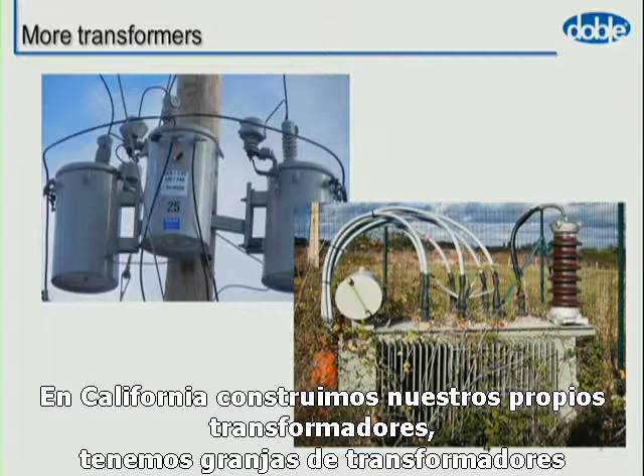Inside, they're complicated. You can just see outside all around the place pictures of transformers. They are complicated devices, and they will fail relatively easily if you know what to do.

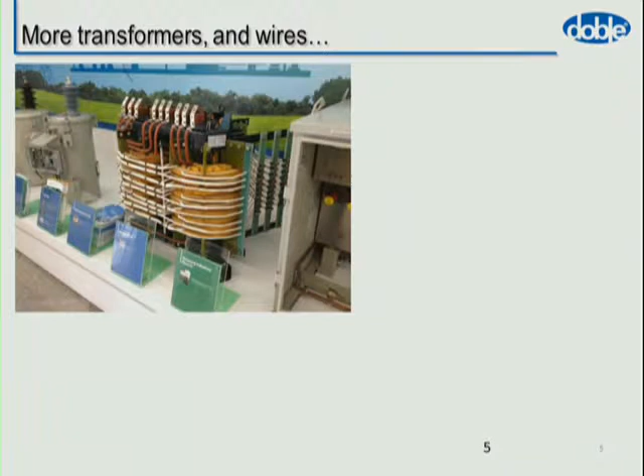In California recently, a year ago now, there were a bunch of transformers taken out of service by some snipers, terrorists. That one is still being investigated. We've seen pipe bombs on substations. These are external causes of transformer issues.

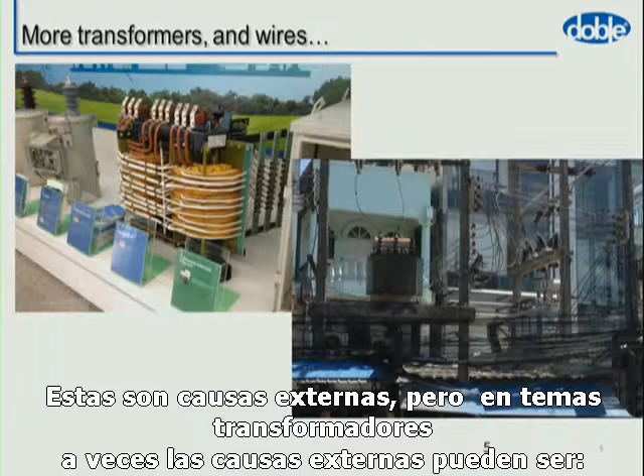Sometimes those external causes can be how you put the transformer together. So this is a transformer, very small, it's pole mounted, it's got its own little set of bushings. There's a transformer on the right, it's got its own little conservator.

Problem is, it doesn't matter how clever you make the transformer, if you then encase it in an operational network where you've got no idea what's happening to it or when, or who attached wires to it, you're going to have a problem making sense of the data. But ultimately, a transformer is relatively simple.

ISO 55000 is an international standards organization standard for asset management, published in January of 2014, this year. It was based on the previous standard, PAS 55. This standard tells you what an asset is: anything that can bring value to your organization. It's up to you to decide what value that is. And asset management is just a coordinated activity of bringing that value out.

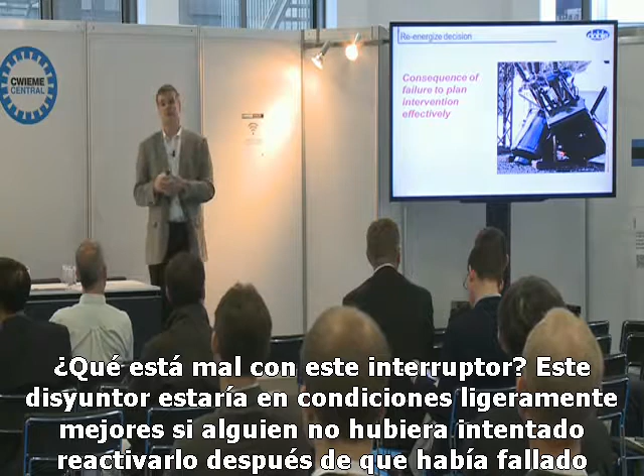What's wrong with this circuit breaker? This circuit breaker would have been in slightly better condition if someone hadn't tried to re-energize it after it had failed. This may seem like a ridiculously small thing.

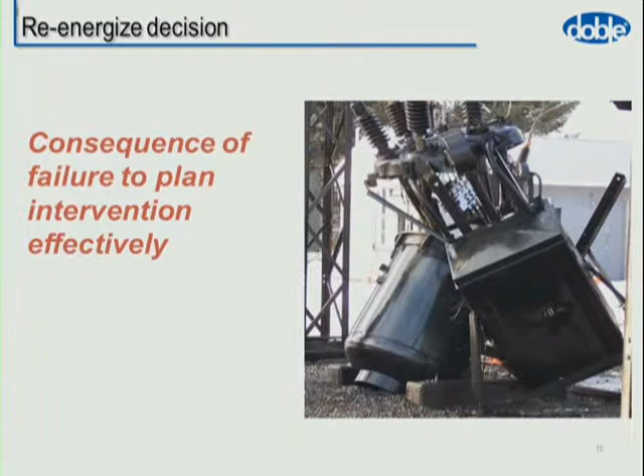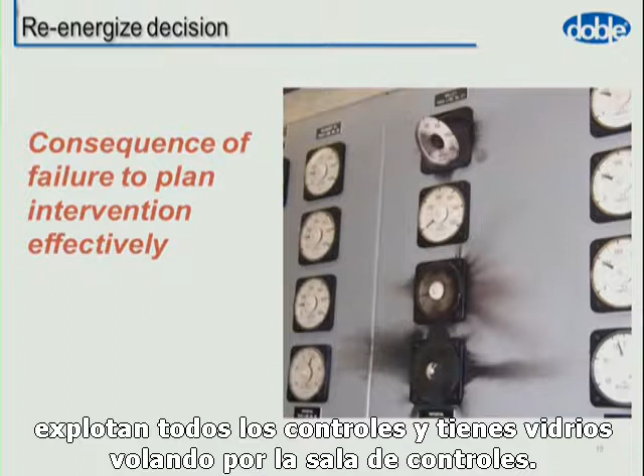There's a control room, they're looking to see if they can re-energize a breaker. They're told it's okay, R210 can go back in, they switch it in. The wrong people have been looking at this. That put 11 kV back on the control wires, sent the energy back into the control room, burst all of the controls, and you've got flying glass across the control room.

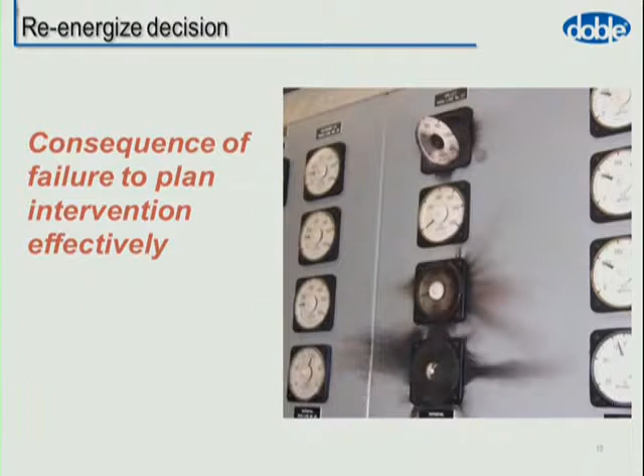Unexpected consequence of a failure. You have to think in terms of what might happen and will result. An intelligent approach will make sure that you don't put that back in service unless you've actually done a proper visual. You need trained people.

And if there's one thing that comes out of this talk, it's knowledge. Someone somewhere has to know what they're doing. Someone has to know what's going on.

Excuse me, sir, could you click on the Life of a Transformer seminar for me?

This is some slides. Each year Doble runs a Life of a Transformer seminar, and we run this as a course. It's 5 days. This particular one is a number of years old.

I've taken a couple of slides from an old buddy of mine, Jin Sim, who runs a thing on how you make a transformer. The point about this is that you're winding coils. I would imagine at a coil winding and industry expo that a lot of people know about this - quite often people don't. And the important thing about coil winding is that you're still using the same techniques, and we're still applying those same techniques from a long time ago.

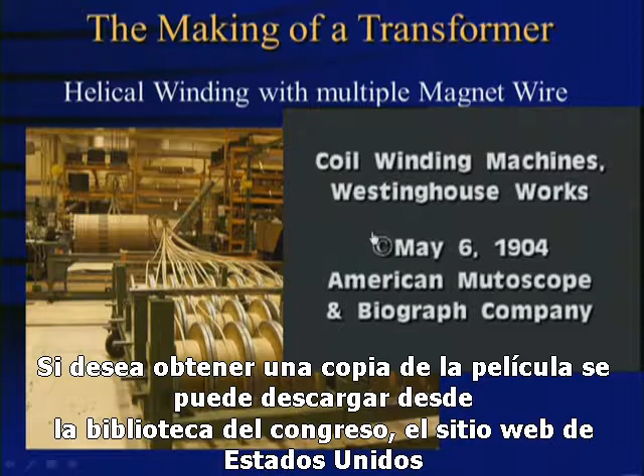Could you click on the video? So this is a movie from Westinghouse. This is 110 years ago. If you want to get a copy of the movie, you can download it from the Library of Congress, which is a United States website.

On the left, you have drums of wire being wrapped into transformer winding. On the right, you have the same approach, big coils of wire. It hasn't really changed that much. The basics of a transformer are the same as Faraday would have recognized 160, 70 years ago - copper, paper, oil, steel.

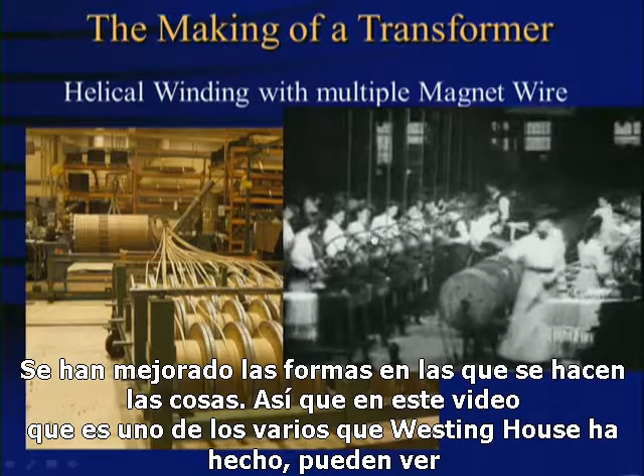We have improvements in the way things are done. So in this video, it's one of several from the Westinghouse works. You can see one, it's all the women who do the work. And two, we have asset managers - they're the ones who wander around looking to make sure everything is done correctly by the women who are actually doing the work. Okay, that's enough of that one, thank you.

So if you just escape out of that.

The life expectancy of a power transformer, IEEE - IEEE will give you that at full load, a standard transformer should last 180,000 hours, 20.55 years.

Peter, could I get... Sorry, it rains, so all of my moisture is external at the moment. I'll just take.

This is an interesting slide. As one, most transformers are not loaded to 100% of the time. And two, we're based on a hotspot calculation, and the hotspot you don't measure 100% correctly, you measure with an estimation. So most of our calculations about the actual aging of a transformer are an estimate. We don't know the true hotspot, we don't know exactly how precise that value is, and we don't know how long it's been at that temperature.

But if we have an estimate, we can then say what the degree of polymerization should be at the end of life and how long our transformer's got left to live.

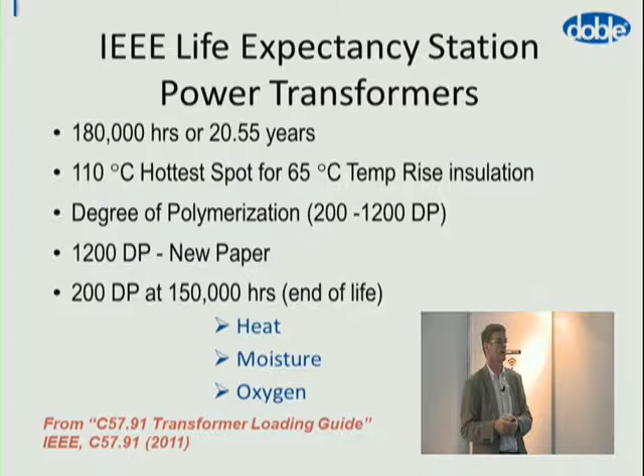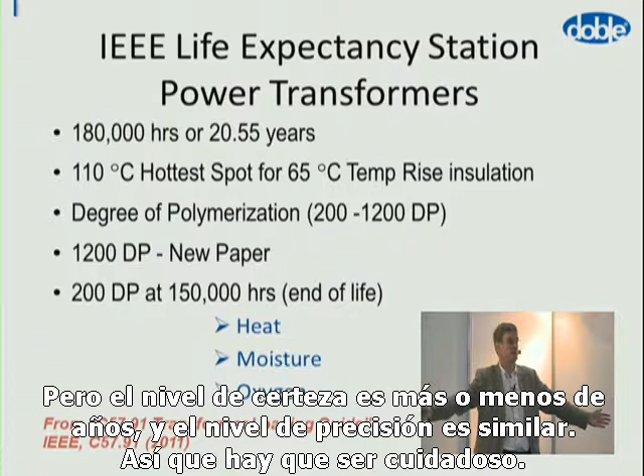People talk about 180,000 hours of life, and you can work out how many years, months, days your transformer's got left. The interesting thing is people will give those numbers in terms of 3 years, 6 months, 4 weeks, 2 days, 7 hours, 5 minutes, and 28 seconds. But the degree of accuracy is plus or minus years, and the degree of precision is similar. So you have to be careful.

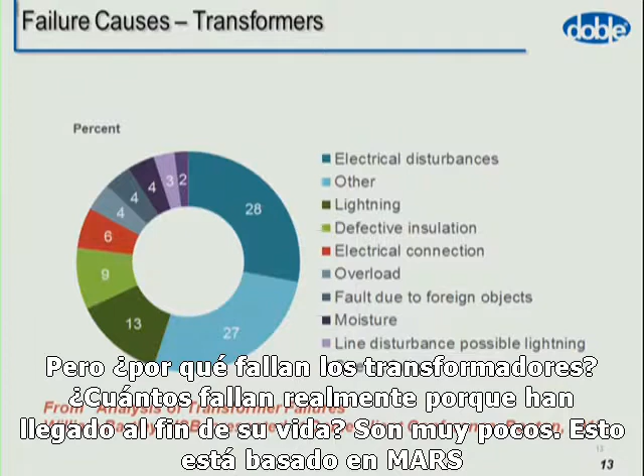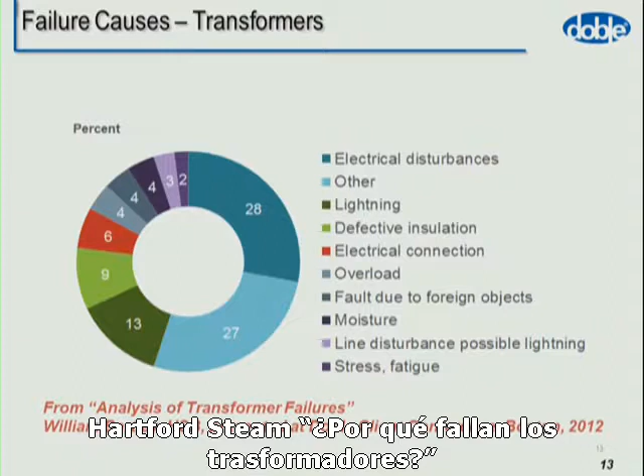But why do transformers fail? How many actually fail because they've just reached end of life? It's very few. This is based on a different company, Hartford Steam Boiler. A gentleman called Bill Bartley presented papers when he was working for Hartford Steam. Why did transformers fail according to the information his clients gave him?

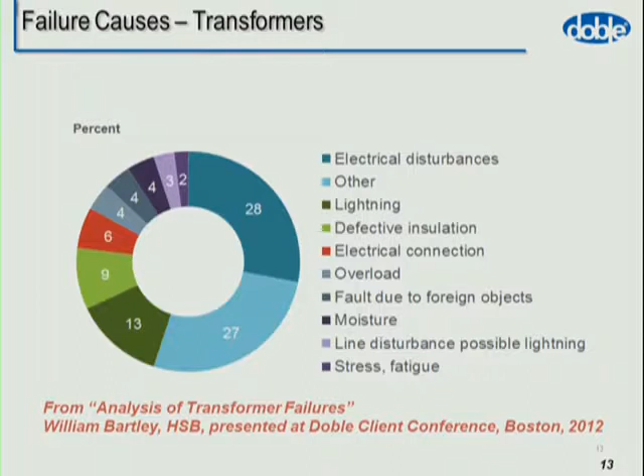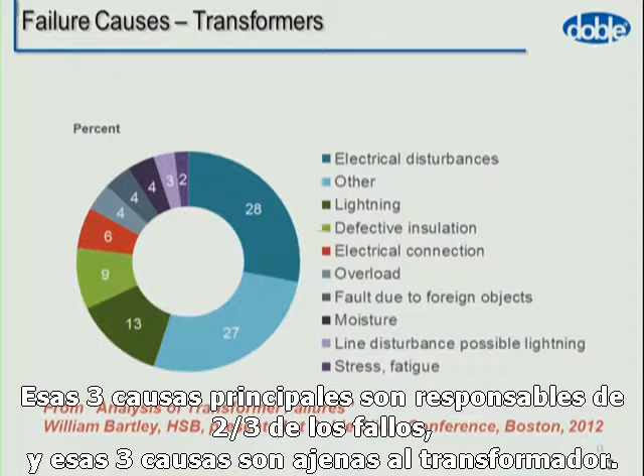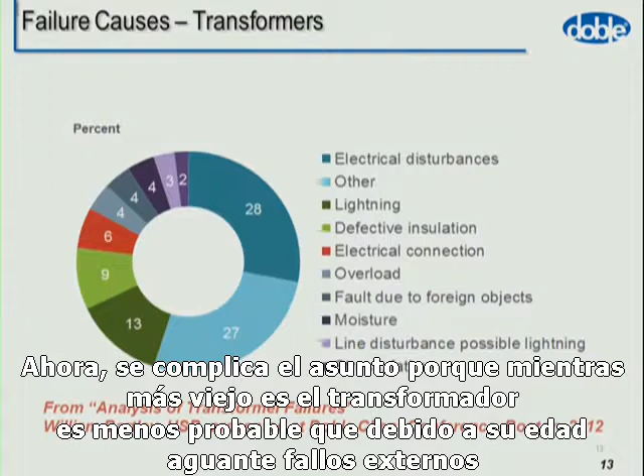Important thing, look at the top 3 causes: electrical disturbances outside of the transformer, other causes outside the transformer, and lightning. Those 3 main causes account for 2/3 of failures, and they are all external to the transformer. Now it does get complicated because the older a transformer is, the less likely it is, because of aging, to withstand an external fault. But 2/3 of the problems are externally caused.

Vandalism, lightning, other sources—our intelligent condition monitoring is not necessarily going to address those causes. So if you have a transformer, think in terms of how we're going to look at all the different sources. If, however, you look at those failures, remember they're based on what people say. These are insurance claims, which are supposed to be exact truth. They aren't always exact truth.

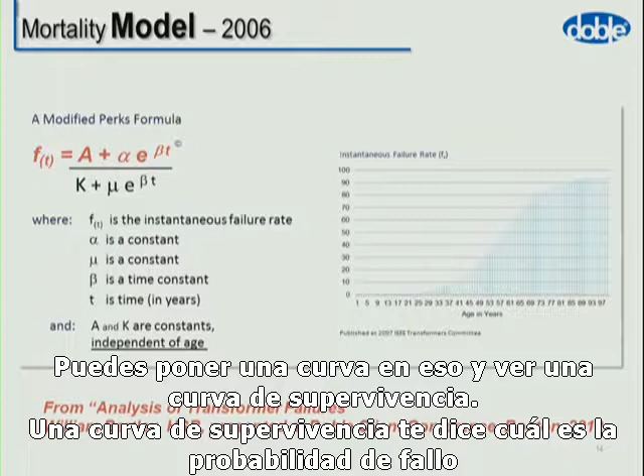You can put a curve on that, and you'll see this as a survivor curve. A survivor curve tells you what the likelihood of failure is and how many of the population should have failed by a certain age. Bill Bartley and his colleagues put together a formula. Your challenge in conversation today is to use the phrase 'modified Perks formula,' which is what this is—I never knew there was a Perks formula. What you often see with this type of chart is a nice increasing failure rate curve. Unfortunately, real life isn't necessarily like that.

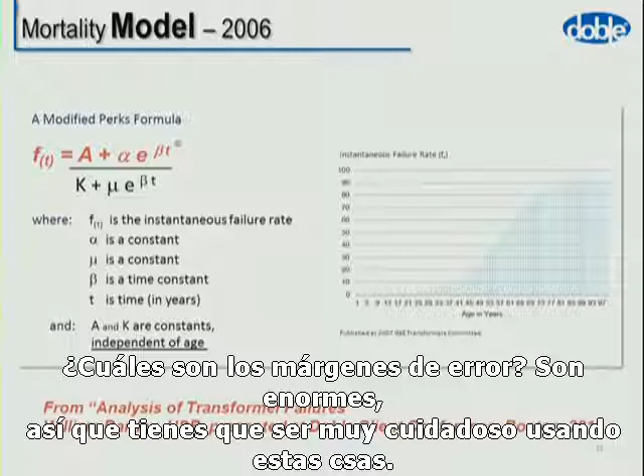Two things: what are the accuracy and precision? What are the error bars on those measurements? They're huge. So we have to be very careful about using these things. But it does say, based on his information, that about half your transformers should have failed by the time they're 40 years old. In my experience with Doble, having looked at thousands of failures around the world, that's not the case.

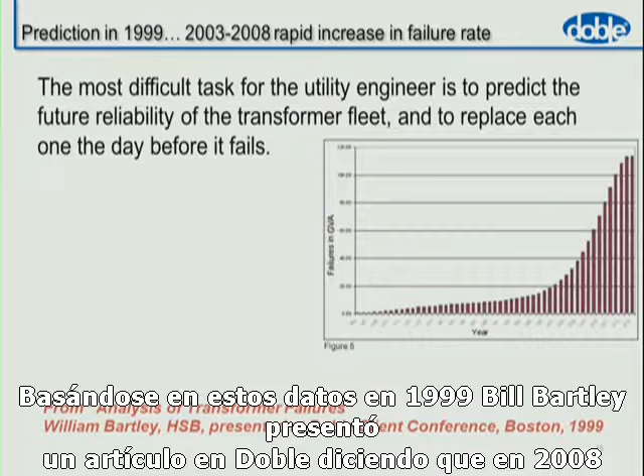On the basis of his results in 1999, Bill Bartley presented a paper at Doble saying that in 2008 there would be a huge rise in failures and the world would not be able to build enough power transformers. So we went to see him in 2011 and said, you need to rewrite the paper because it didn't happen. So he rewrote the paper.

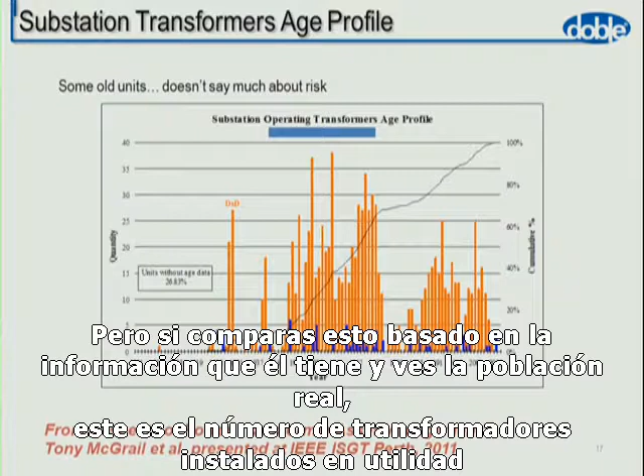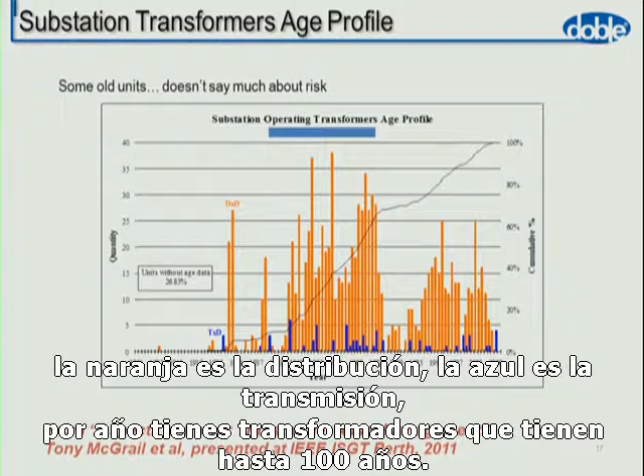12 years on, he's moved the date back 12 years, now predicting in 2020 there will be a huge rise in failure rates and we won't be able to cope. But if you compare this to an actual population—this is the number of transformers installed at a utility, the orange being distribution, the blue being transmission by year—you have transformers going back over 100 years: one from 1907, others from 1920, 1928.

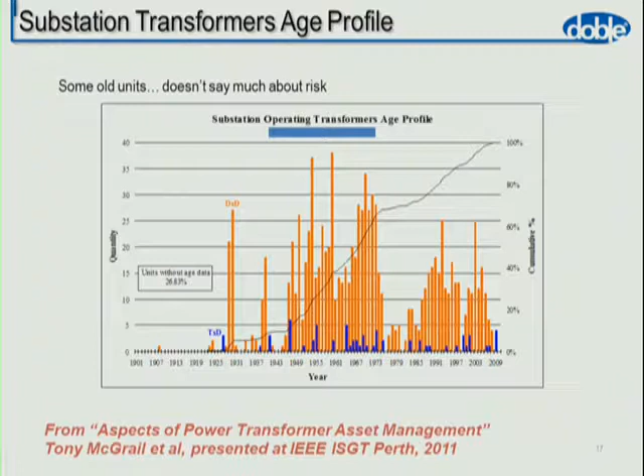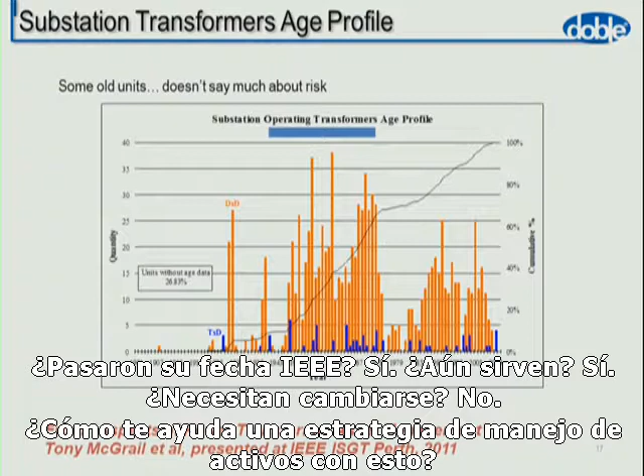They're big transformers and they work fine. Have they gone past their IEEE sell-by date? Yes. Do they still work? Yes. Do they need replacing? No. I was the asset manager who helped put the strategy together to deal with these. You don't need to replace these because they're old, and you don't need to replace them because they've seen a lot of life—they were built to withstand it.

So a lot of these transformers from the old times will still be there in 100 years' time, unless you have those 2/3 of external causes—lightning, vandalism, system faults. But even then, they're built big. So what we found was that the probability of failure during the first 70 years starts high and fades away. It's the start of a bathtub curve, and likely by the time you get to the bottom of that curve, random failures will just take over and you won't see the far end.

But we're seeing 60, 70, 80-year-old transformers, and the failure rate for that population is not increasing. Is it worth putting monitoring on those transformers? Probably not. How much do you need to know about a transformer that has sat there for 80 years doing its job? How much more can you learn about that transformer? Probably very little.

But the interesting thing is, as Marsh, as HSB, as Aegis, other insurance companies will tell you, the transformer is a very small part of the insurance loss. It's the business interruption. So we're interested in transformers and their failure because it may take out the generator station, may take out a chemical plant. It's that dollar consequence which is huge.

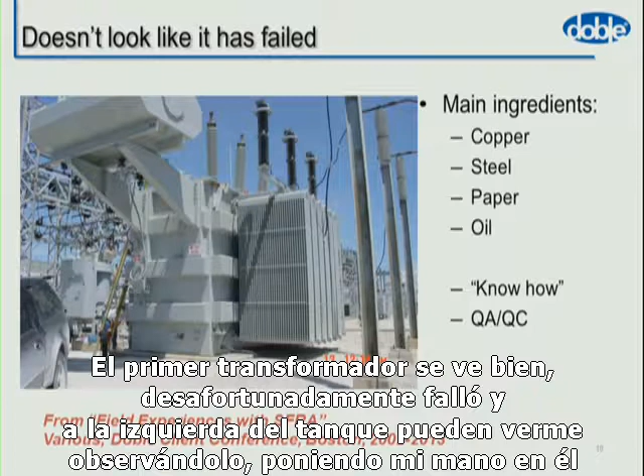So that transformer looks okay. Unfortunately, it's failed. I'm just on the left-hand side of the tank. You can see me looking at it, putting my hand on the tank and saying, do you feel okay? Because it's very difficult to tell. You take the windings out from the transformer, very complicated device. That's a failed transformer. That one was repaired, put back in the tank, put back in service.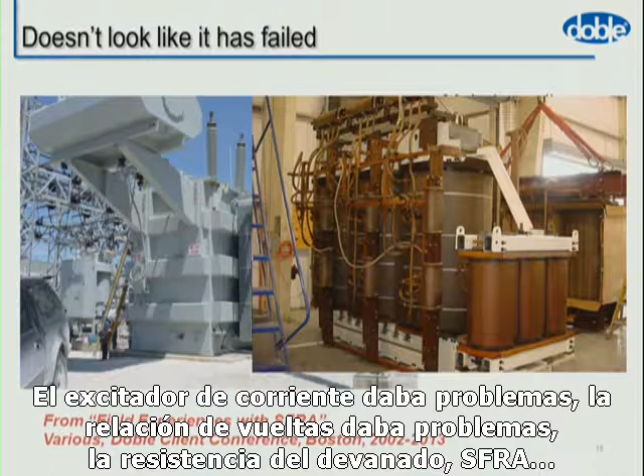That was actually identified using about 3 or 4 different techniques. The exciting currents gave a problem, turns ratio gave a problem, winding resistance, SFRA, a whole bunch of different things gave a problem. And you have to put all that information together to try and identify the cause, to see if it's worth taking to the factory to take it out and fix it, because it all costs money.

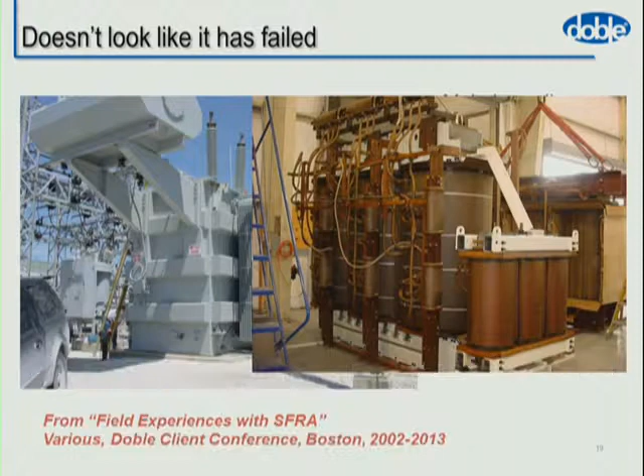This transformer hasn't failed. It's the same transformer. It still has not failed. It was pushed. It didn't fail. Something else damaged it. So you have to be very careful about failure statistics.

And now the consequence is going to be, is there any oil from the transformer in the river? That's going to be a cleanup cost, which the company is liable for. And in the UK, in Europe, they're not the transportation company - the owners of the transformer are liable.

Standard transformer fire. If you do things right on a substation, you can build cable trays between transformers to allow all the cables to be connected. You often find snakes and small animals.

In this case, one transformer failed. It's the one on the left. And it failed because a snake crawled up the bushing, caused a flashover, bushing failed, transformer followed. Oil from that failure went into the cable tray, moved along to the next transformer, took that transformer out. One snake took out 4 transformers. It's in Arizona.

How much condition monitoring do people sell for snakes? Do you have a snake monitor?

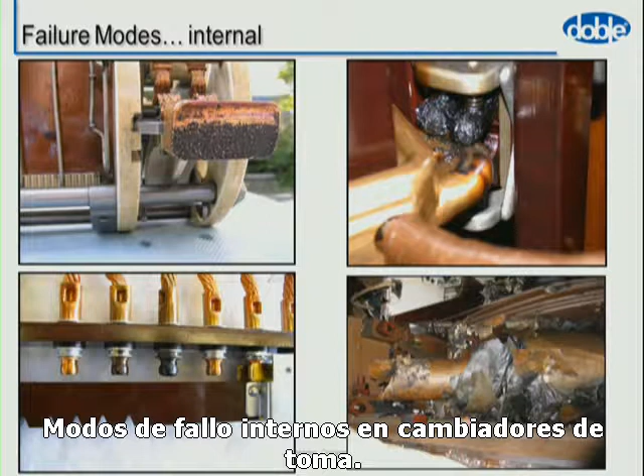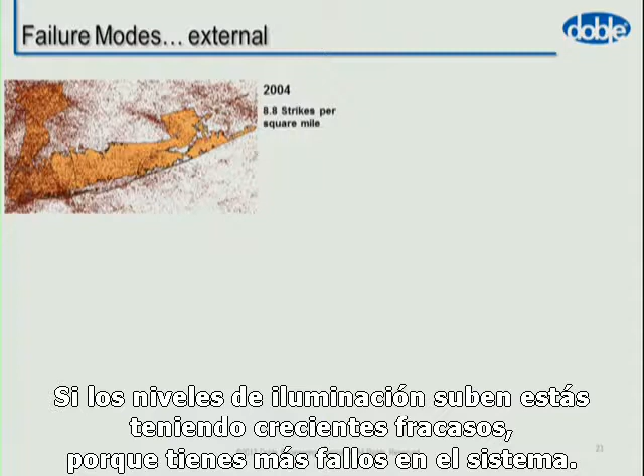Internal failure modes, coking on tap changers, overheating of windings at particular design spots. Lightning - if the lightning levels go up, you will have an increase in failures because you have more faults on the system.

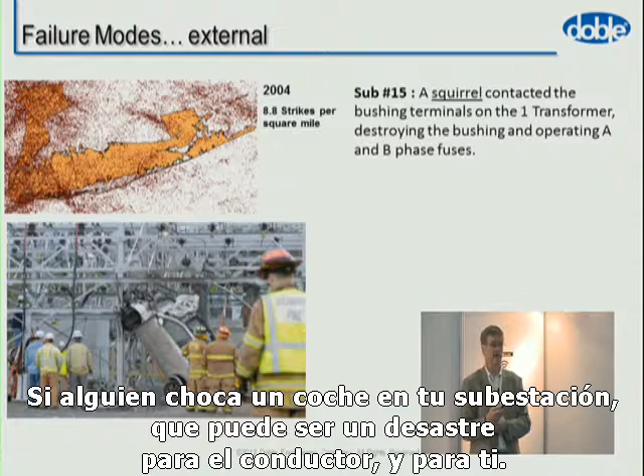If you have animals contacting - snakes, squirrels, birds - they too will cause problems. Someone drives a car into your substation, that can be a disaster for the driver, but also for yourself. And then you have lightning. I think that's staged, it's a Hollywood movie, but it gives you the idea.

If you look on YouTube, there are pictures that people have taken while driving along, and they happen to see lightning hit a pole-top transformer. Those are available for download, quite spectacular.

What monitoring do we do for lightning? We can pick that up. But the question is, where's the intelligence? If I'm going to have a smart grid, I want to put that intelligence so my transformer is protected and the business it serves is protected.

So part of the intelligence is, do you justify a decision? So in this case, I'm making a decision. On the left side, I have a transformer, it's been damaged. Do I replace it or do I fix it?

Simple decision. In this case, it's false that you should replace it, and it's true that you should refurbish it or fix it. The nice thing about this approach, it's a decision tree, is that you can put prices, you can put dollars against the different outcomes, and you can put probabilities. So we've identified that the chance of a new one failing is 1% at $1 million, and the chance of a refurbished unit failing is 5%.

You can then work out the expected monetary value of your decision, and you should refurbish. People like spreadsheets, and this is just spreadsheets. You can take the level of analysis one stage further, and you can do this in real time, continuously, looking at all of the available data.

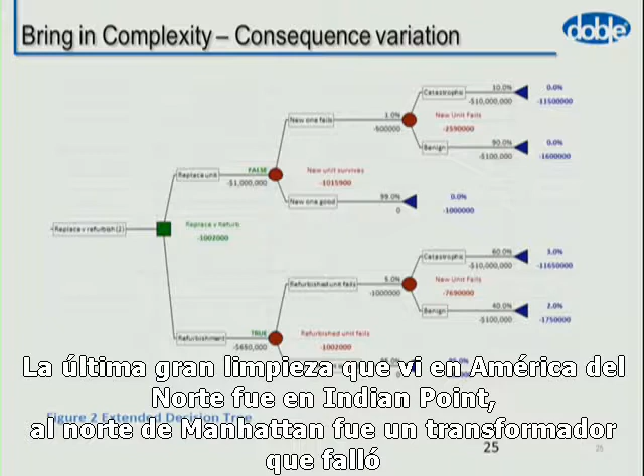What happens if we add in that the failure may be catastrophic, and now we don't just have the cost of a new transformer, we have the cost of the cleanup, and the cleanup could be $10 million. The last large cleanup I came across in North America was at Indian Point, just north of Manhattan. That was a transformer that failed. It was a $20 million US cleanup cost, PCBs in the Hudson River.

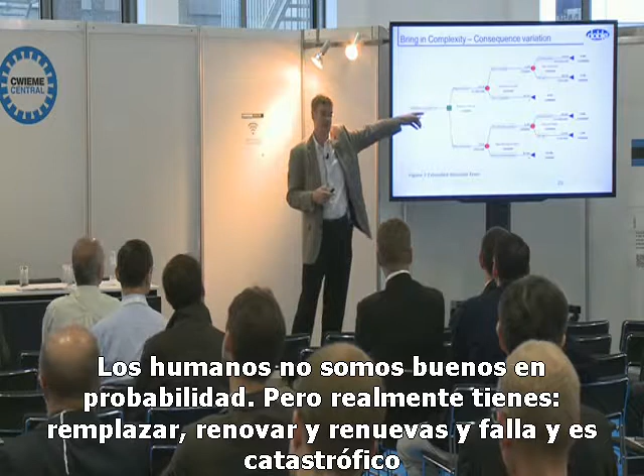There's a huge possible cost implication, but only a small chance it fails, so we've got to do contingent probabilities. Humans are not very good at probabilities at all. But really you've got replace or refurbish. If you refurbish and it fails and it's catastrophic, that's probability of A given B. What is the cost? But it's still true you should refurbish.

As part of an asset management system, ISO 55000, this is the start of a decision to replace or refurbish. If you want to make an intelligent decision, you need intelligent data, and tools which justify the decision, so someone can come along and audit it.

So a little bit on condition monitoring. Three C's: control, context, conclusion. You have to control the measurement. That doesn't mean we over-control - there's no point making a temperature measurement to 4 decimal places on a power transformer. We don't need the ambient temperature to 2 decimal places. It's not useful. Understand the context of the measurement.

If you're making a measurement, you have to know - did the transformer trip out? Did I take it out for maintenance? Have I used this with lots of through faults? What's the context of the decision? And when you make a decision, it has to be a conclusion which is actionable. People don't understand that you can either do nothing by default, which is ignoring it, or you can decide - do nothing by design. You have to have an actionable conclusion, an intervention.

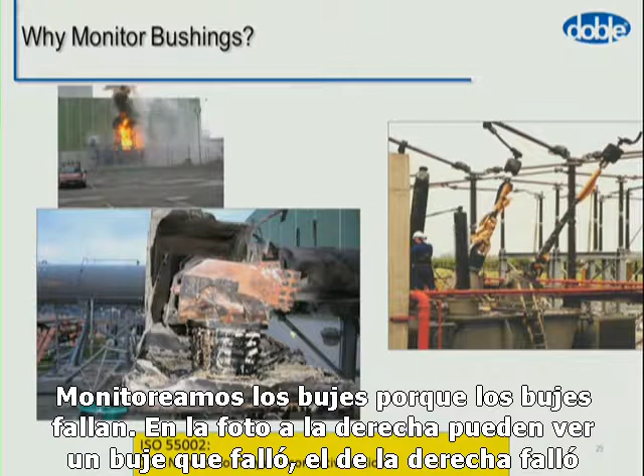Let me give some examples. There's a paper from guys in Australia at the 80th conference we had in 2013, looking at bushings. Why monitor bushings? Monitor bushings because they fail. In the picture on the right, you can see the bushing on the right failed. The bushing in the middle, which has been taken apart, did not fail - it was killed by something else, which is the bushing next to it failing, and the explosion which took it out destroyed the center phase.

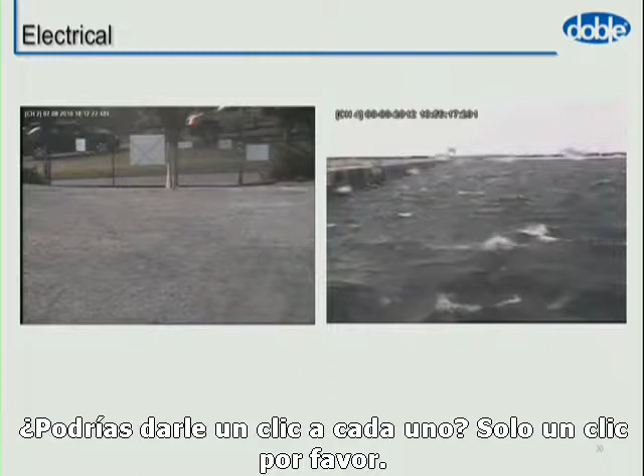So the video on the left is very, very quick when it happens - that's a bushing failure. How much monitoring would you need on this substation on the left to be able to detect a bushing fail? You could sit there for 50 years seeing nothing. There has to be a cost benefit to justify that failure being identified.

On the right, you've got a bushing at an oil circuit breaker. Again, you could sit there with a lot of monitoring for a lot of time, but when that bushing fails and takes a circuit breaker out, there is a big consequence. The main cost of this could be purely reputational and stock price. But there's a lot of interest in these things. How would condition monitoring help with those things?

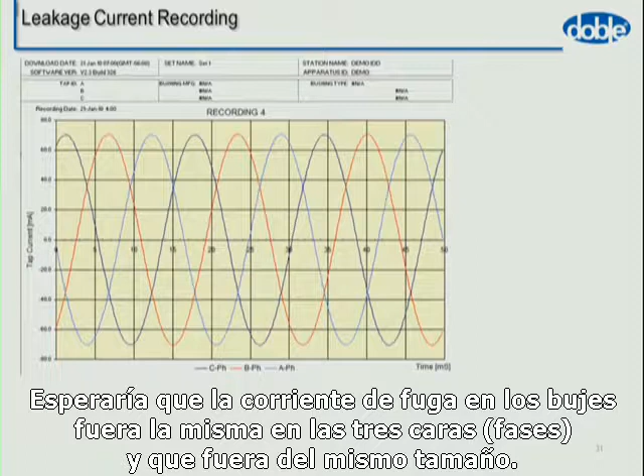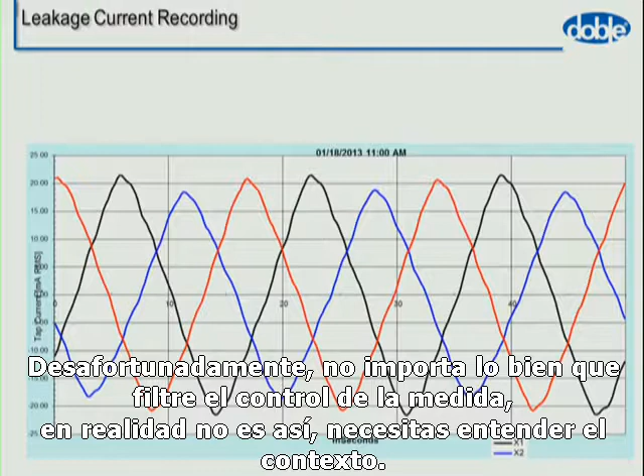You can measure the leakage current through the bushings - it's relatively easy to do. You'd expect the leakage current through the bushing to be the same on all three phases and about the same size. Unfortunately, no matter how well you control the actual measurement, in reality it's not like that. You have to understand the context - the system voltage changes, bushings may not be the same, they have different capacitances. These are real leakage currents, and they're not sinusoids, not equal magnitude, and not 120 degrees apart. But this is what you have to get used to.

In this case, the operations guys on a transmission system - trying to change a transmission system is like trying to steer a battleship. It's a big, slow thing. Once the alarm came in from the bushing monitor, they had 2 minutes to take the transformer out of service, which they did. In the investigation, they realized there was a lot of damage to that bushing, and it would have taken the transformer out.

One of the tests for transformer integrity is SFRA, sweep frequency response. It tells you about the mechanical integrity of a transformer. We can look at the coil and the response, and see how they change over time. SFRA is a very, very good tool for detecting movement.

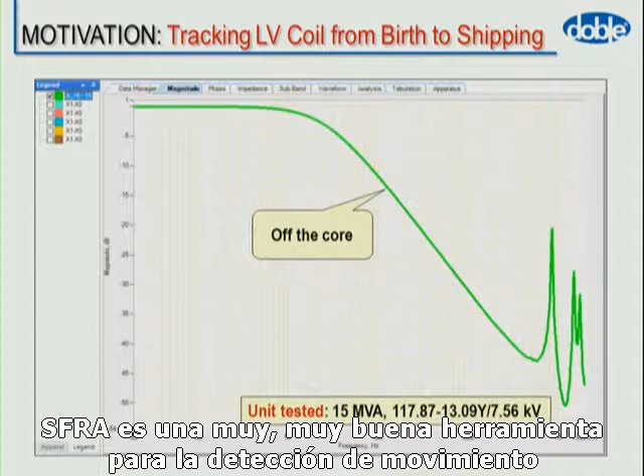It's also a very good tool to detect people who are not very good at field testing, because they get the results wrong.

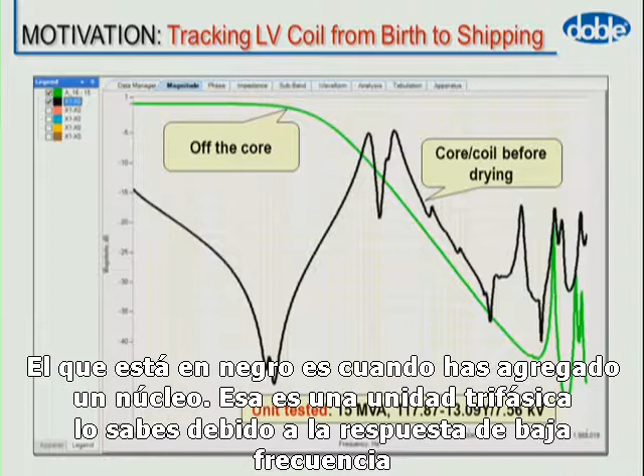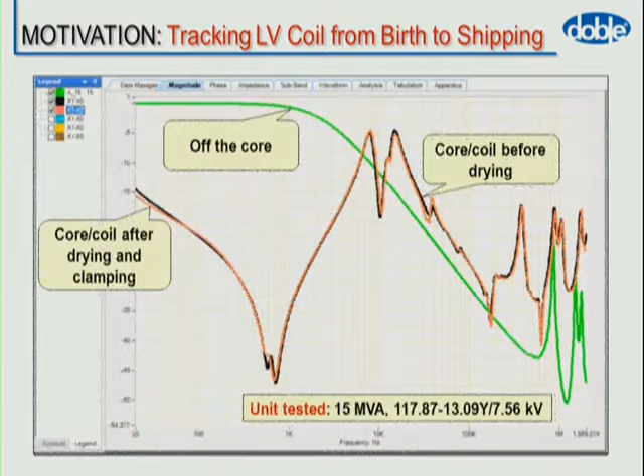Take that coil, dry it out. Does it make much of a difference? No.

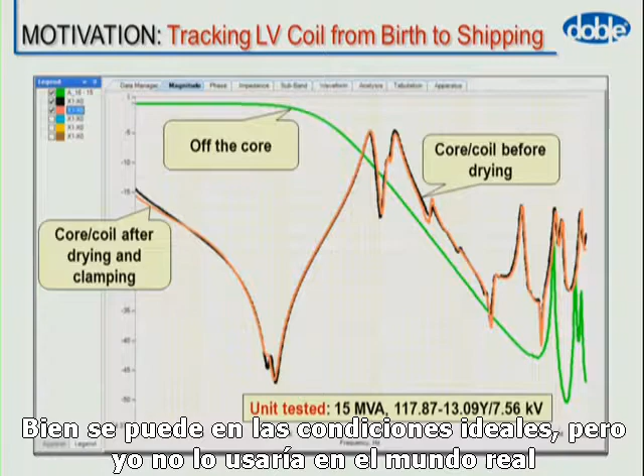SFRA recently has had technical papers where people say you can measure the moisture in your transformer. Well, you can under ideal conditions, but I wouldn't use it in the real world, because there are so many other things which have such a far greater effect that the moisture is neither here nor there.

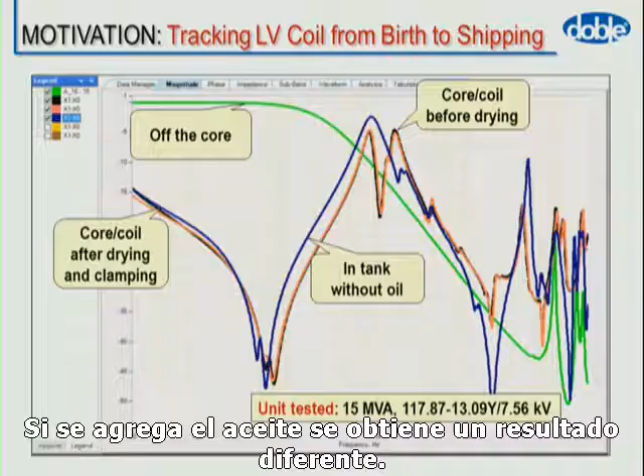You add oil, you get a different result. You dry and clamp, you get a different result. You add oil - there's lots and lots of variation. What is best to have is a reference.

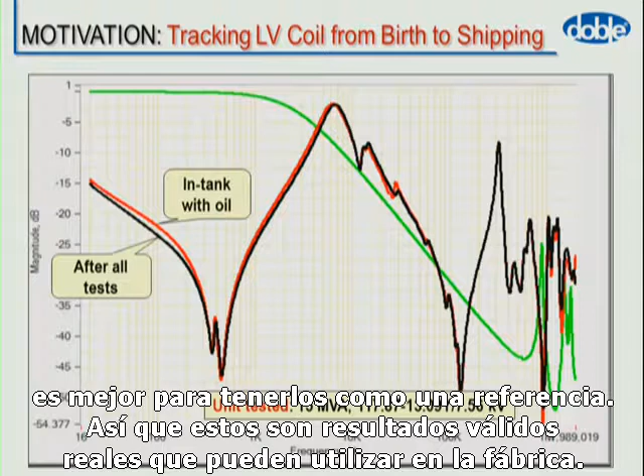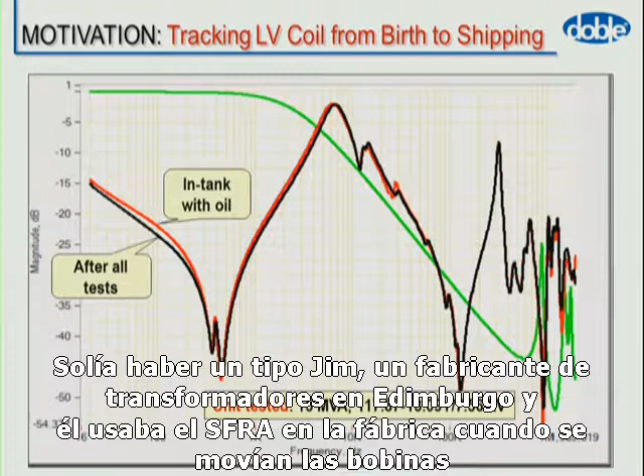So these are actual valid results that you can use in the factory. There used to be a guy, Jim Fivey, at a Transformer Manufacturer in Edinburgh, and he would use SFRA in the factory as the coils were moved around to check to see if there's any movement or damage. And it works - but you need someone who knows what they're doing.

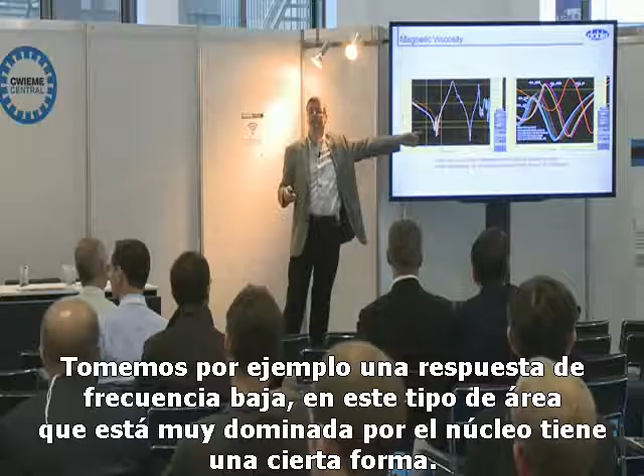Take, for example, a low frequency response. In this kind of area, that's heavily dominated by the core. It has an expected shape. That will change as the core relaxes, and the core will get to a point of lowest total energy, lowest action. As it relaxes, the frequency response will change.

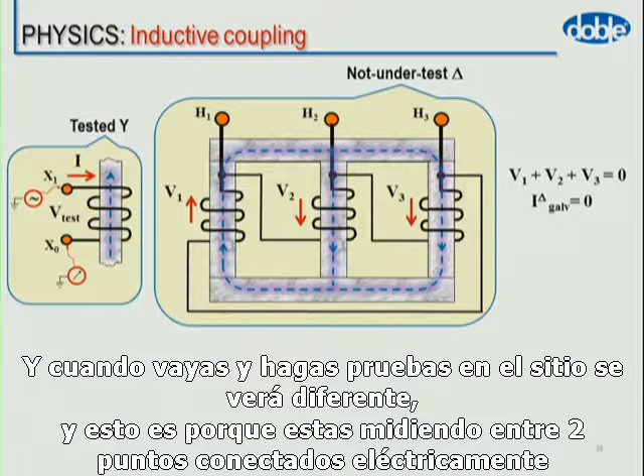When you go and test this on site later, it's going to look different. That's because you're measuring between 2 points, and those 2 points are electrically connected - capacitively, inductively - to the whole transformer. So you're testing everything between those 2 points.

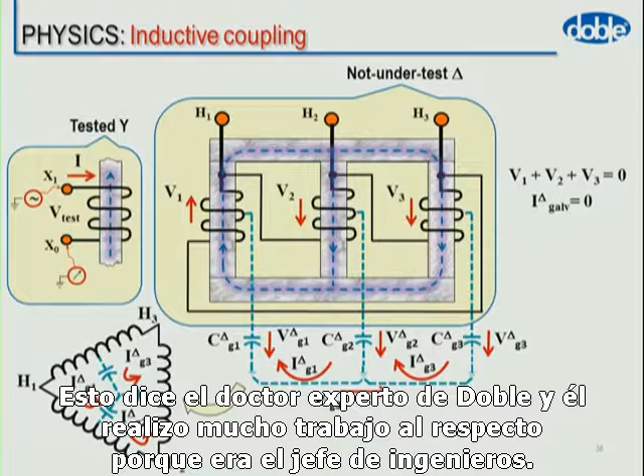This is Dr. Lachman, Dr. Mark Lachman from Doble, and he does a lot of work on this because he used to work as the Delta Star chief test engineer.

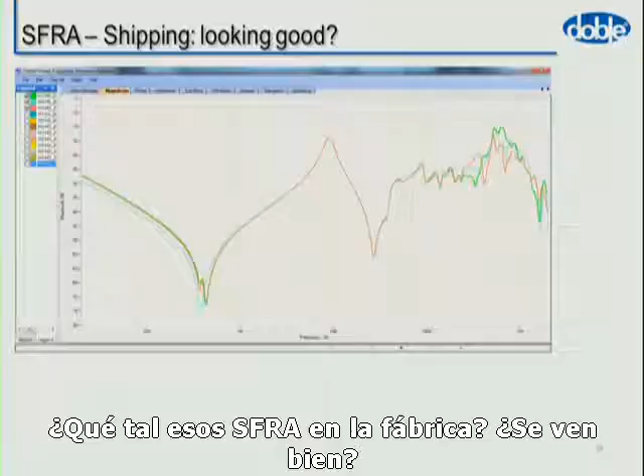So how about those SFRA results in the factory? Do they look okay? All those who agree, please raise one hand. Not big on SFRA, okay.

They look fine, they're a fingerprint. They look okay. If you know what you're doing, you can tell it's a three-phase, you can tell which phase is which. You know it has the expected shape - it looks like you'd expect. There are differences at high frequency. It may be due to asymmetry in the design, or due to some grounding variation.

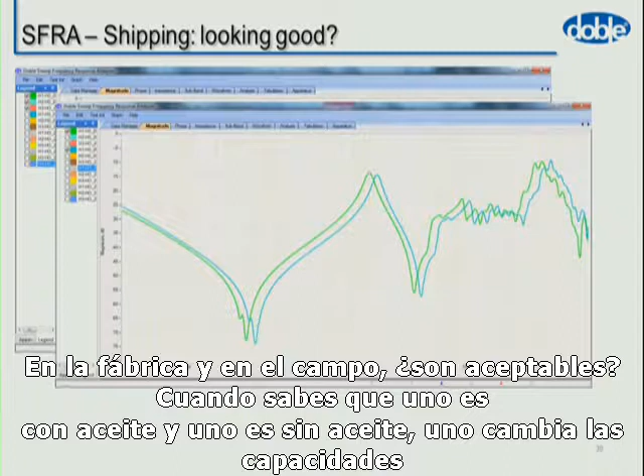In the factory and in the field, are these acceptable? When you know that one's with oil and one's without oil, you've changed the capacitance - the resonant frequency due to the LC combination has shifted - they're acceptable.

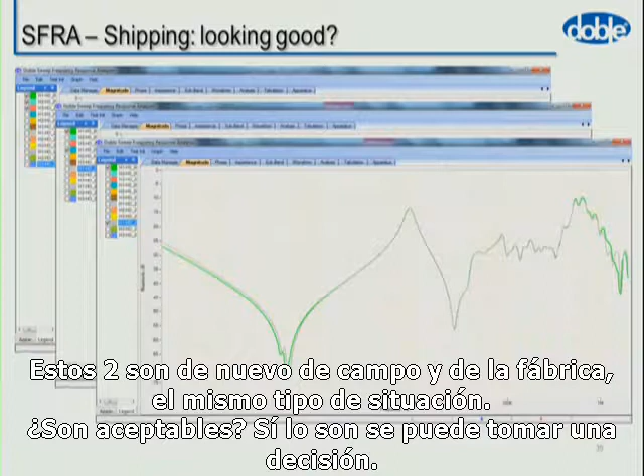What about these two? These two are again field and factory, same kind of situation. Are they acceptable? Yes, they are. You can make a decision.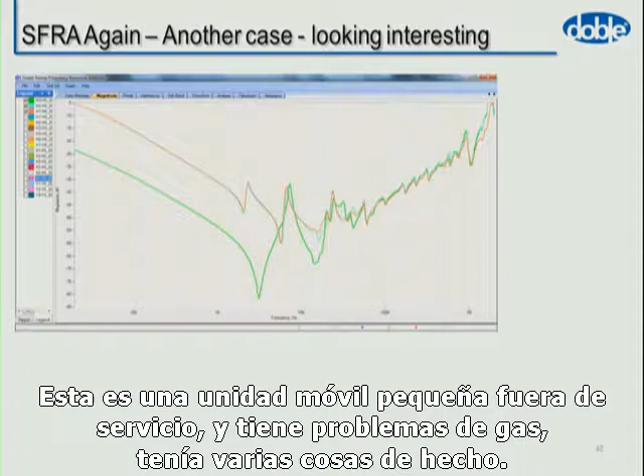So this is a small mobile unit. It was taken out of service. It had some gassing, it had various things going on.

It's not often I get people invading the stage, but Peter's allowed. This transformer was taken out of service.

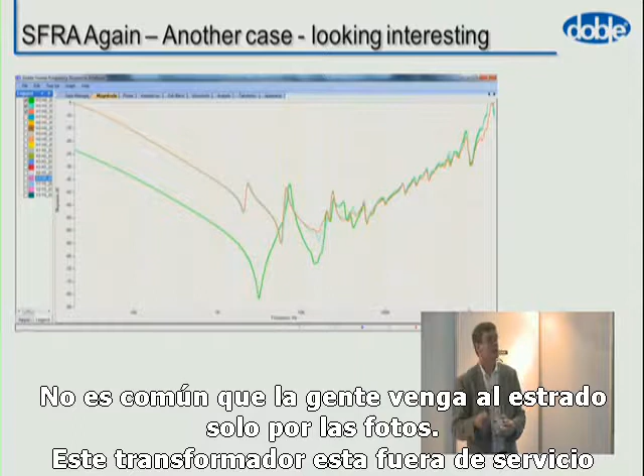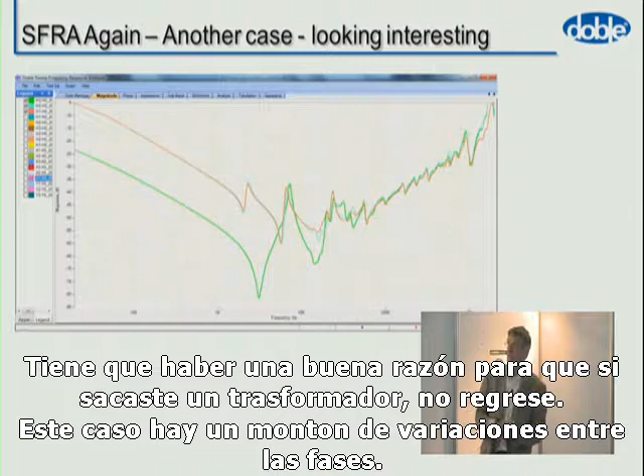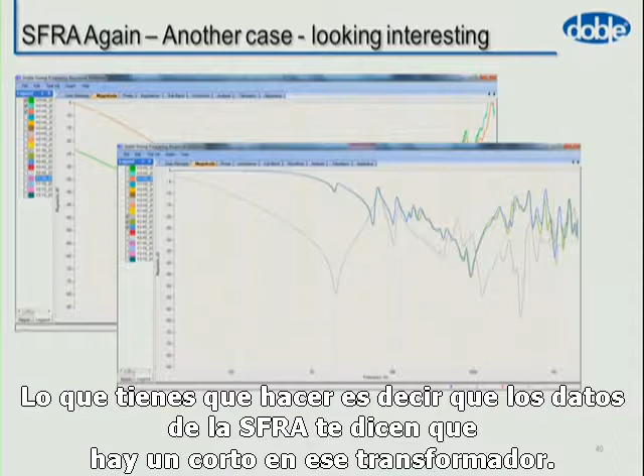Golden rule: if you took it out, it goes back in. There has to be a really good reason if you have taken a transformer out of service that it doesn't go back in. In this case, there's a lot of variation between the phases. But what you have to do is say the data in the SFRA here tells me there's a shorted turn on that transformer.

No other test really showed that. And when you look at the nameplate, there's enough information there to allow you to make an actionable conclusion. And the conclusion is it goes back in service.

The reason for that is during testing, someone's identified a tertiary winding. Can anyone see the tertiary winding on that transformer? It's not obvious.

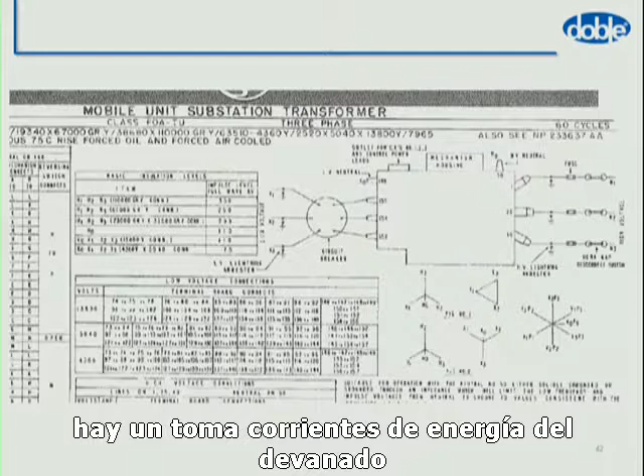Just up here, there are outlets from a power outlet winding that powers a substation electricity control unit. If you short one of those, it provides a short circuit.

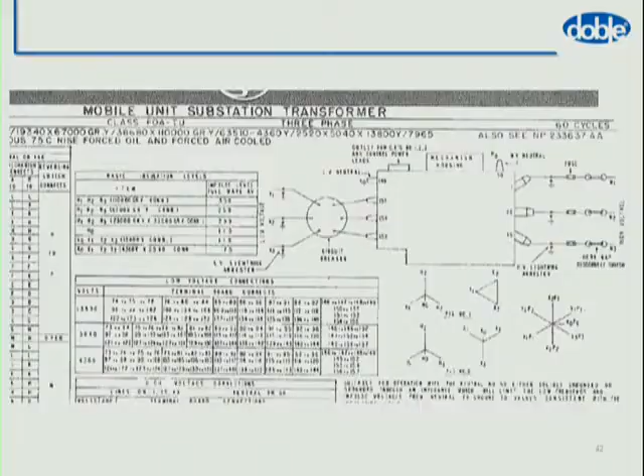So this is about context. Someone somewhere has to know what's going on. There's a lot of data coming in from an online monitoring system by the millisecond with a SCADA system. When I worked at a North American utility, 50% of our stations had no SCADA. Let that sink in. If we wanted to find out that something was wrong at the substation, we had to wait till someone rang in and said, my lights have gone out.

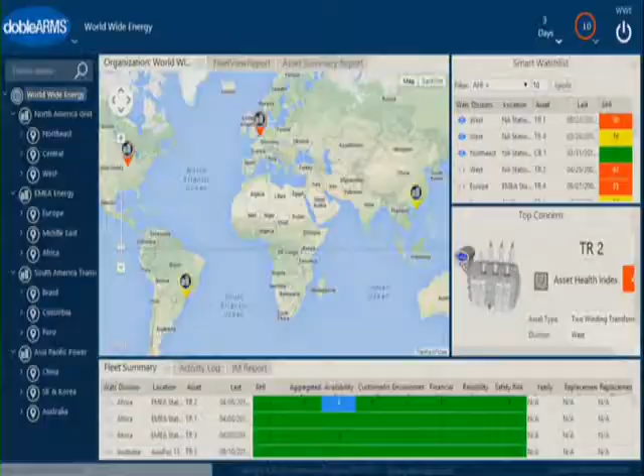Red and yellow. Red, bad, green, good. Where do we look? We look at the places where it's red. You don't need to be 100% focused on your transformers or your intelligence system 100% of the time.

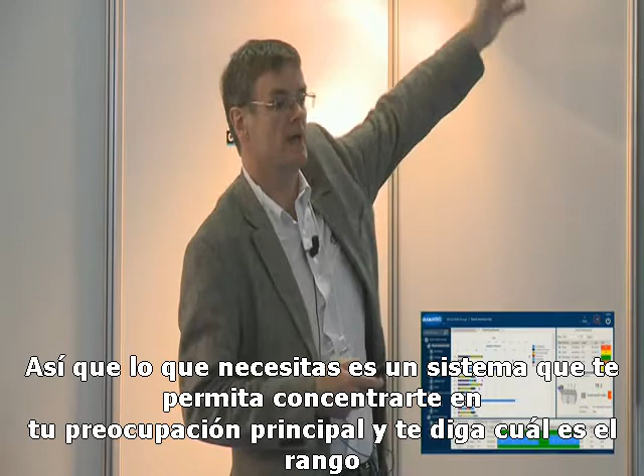As a background, as an individual, how much information are you as a person taking in second by second? The answer is about 1.5 gigabytes. You're only aware of about a few megabytes. So what you need is a system which will allow you to focus on your top concern and tell you what the ranking is, what the impact will be if this is out financially, and what the likelihood of that is.

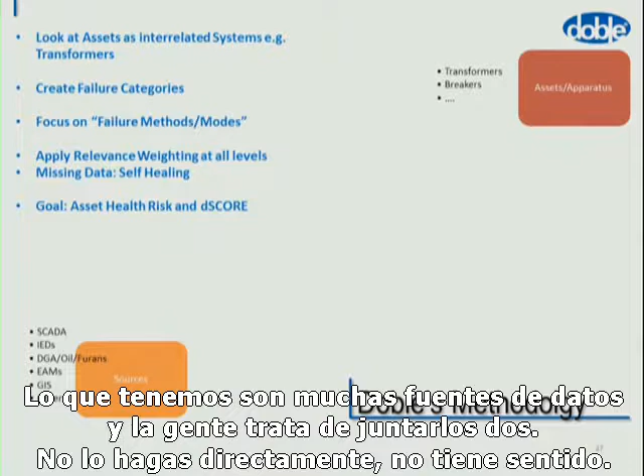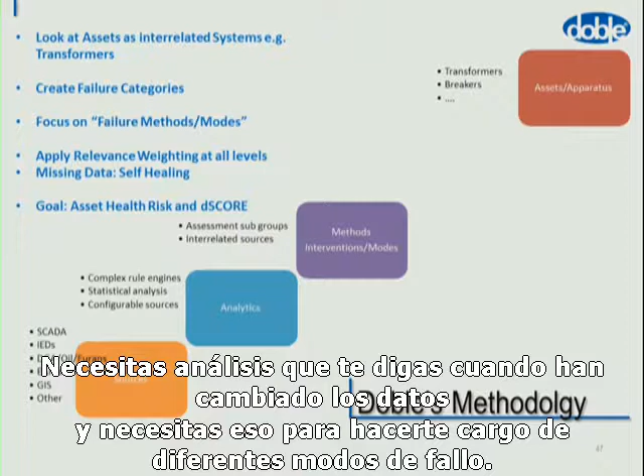The way we look at that is to start and say we're interested in the assets, asset management. What we have are lots of data sources, and what people try to do is link the two directly. Don't do it directly, it doesn't make sense. You need analytics which will tell you when the data has changed, and you need to use those to address failure modes. If the data doesn't address a failure mode, ask the question why you collect it.

Those can be grouped into an assessment. Those assessments will then tell you about a logical part of the transformer. And the data has to have relevance. So we can look at one particular transformer and say green good, yellow bad, blue we're not too sure of. But you need to be able to bring all of the data together to give you a risk score.

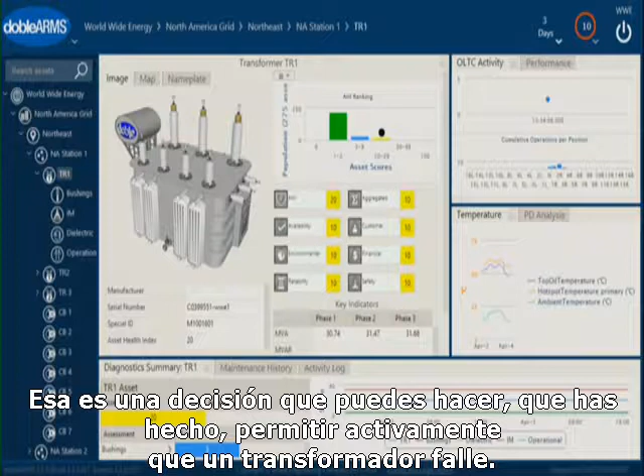Because you may make the decision that this transformer is in poor condition, but we'll let it fail. That's a decision which you can make, which we have made - actively letting a transformer fail.

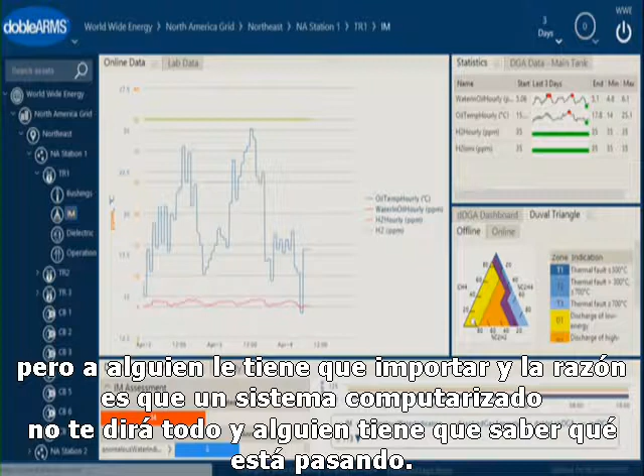99.999% of people in your organization don't care about this level of data, but someone should. And the reason they should is that the computer system won't tell you everything, and someone has to know what's going on.

I will always come back to the third line. We still need people who know what they're doing. Otherwise, we're always going to pay extra for that ability to be ignorant.

As a thought, how many people have heard of the Titanic? Titanic, a big ship. Kate and Leo, 1997 movie, Oscars. A lot of people died, as a result of which, they put lifeboats on all ships based on the number of people, not based on the number of tons the ship is.

How many people have heard of the SS Eastland? There it is. It rolled over at the dock in Chicago. It was already top heavy. You add more stuff to it, it rolled over. For those who went to the CWIEME in Chicago, you can go see the plaque. 844 people died. No movie.